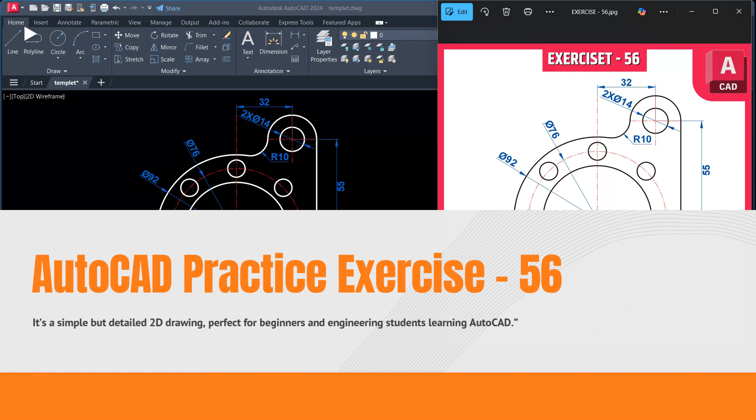It's a simple but detailed 2D drawing, perfect for beginners and engineering students who want to learn AutoCAD. Okay, so let's get started. Step 1: draw the main circle.

Let's begin by drawing the outer large circle with a diameter of 92 using the circle command. This is our outer circle, 92 diameter. Just activate C for circle command and put our diameter using D, enter, 92, press enter. Now create an inner reference circle with diameter 76, center at the same point.

This second circle will have diameter 76 using the same center point. Just activate C for circle command, click on the same center point, D for diameter, 76, press enter. Finally draw the base circle with diameter 60, which will help us place all 8 holes. Just activate C for circle command, click on same center point, D for diameter 60.

Now step 2, array of holes. Using the circle command again, create a small circle hole with diameter 10 on the 76 diameter circle. If you look carefully, this diameter is 76, and we need to create a small circle of diameter 10 on this circle, repeated 8 times. Activate circle command using C, enter, click on this coordinate point, use D for diameter, 10, press enter. Now select this circle and use the array command.

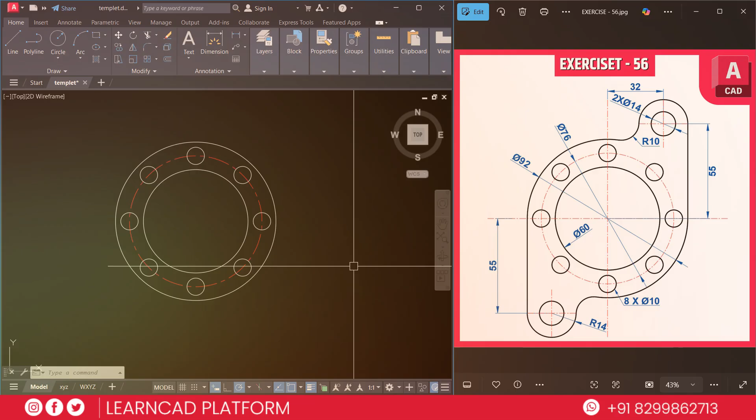Now step 3, upper side circles and holes. Draw the upper side circle with diameter 14. This inner side circle with diameter 14 is at a distance of 32 from the center. So from the center, move 32, here. And yes, there are two lines of this — mirror the first using mirror to place the second. Don't forget the radius of this curve, which is 10.

Activate circle command using C, enter, click on this same center point, and put the diameter value as 14, press enter. Select this circle using M for move command, move it upside by 55, press enter. Now choose M for move, P for previous selection, press enter, click on a specific point, and put the value as 32, press enter.

Now create one more circle with radius 14 on the same center point using 14, press enter. Now choose the line command using L, enter, click from this coordinate point to this coordinate point. Now we need to create these curves with radius 10. Use the fillet command, F for fillet, R for radius, radius 10, use T for trim and choose no trim. Select this circle to this circle.

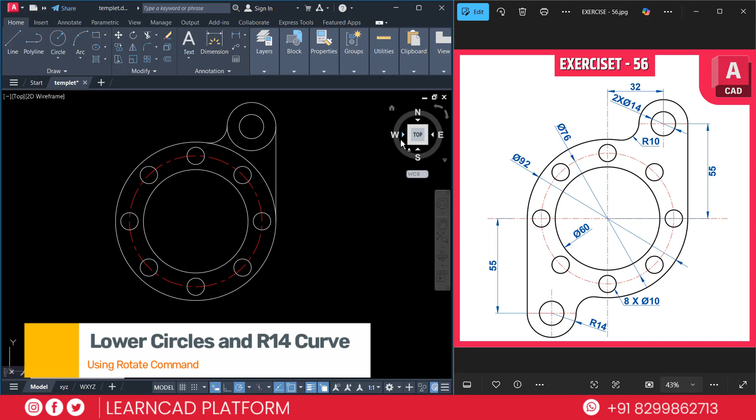Now step 4, lower circle with radius 14 curves. You can use the same process for the downside, or I prefer selecting all these circles and arcs using MI for mirror, select this point, and choose no for the trim option. Same for this one: select it, choose MI for mirror, click on the center point, choose no.

Select all these, E for erase. This is the first option, but as a second option you can select all these using RO for rotate, click on the same center point, choose C for copy, and put it at 180 degrees. I prefer this one — it's easier.

Now step 5, final touch. Let's trim all the extra parts using TR, double enter. Trim this one, this one, this one, and this one. Zoom in and clean up the corners using trim and fillet commands. Now everything looks clean and symmetric, just like our original drawing.

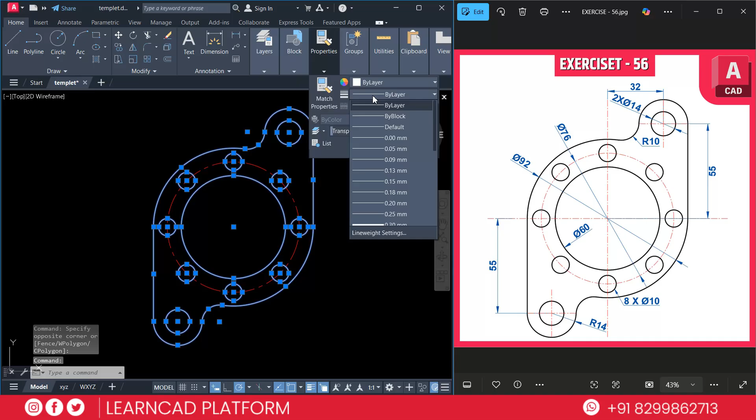Select all this drawing except the center line. Go to properties and add line thickness of 0.30. Now step 6, add dimensions.

I already explained in every drawing how you can add dimensions. You can use DIM from here, DIM for dimension, and add dimensions properly wherever you want. After adding your dimensions, your drawing looks like that.